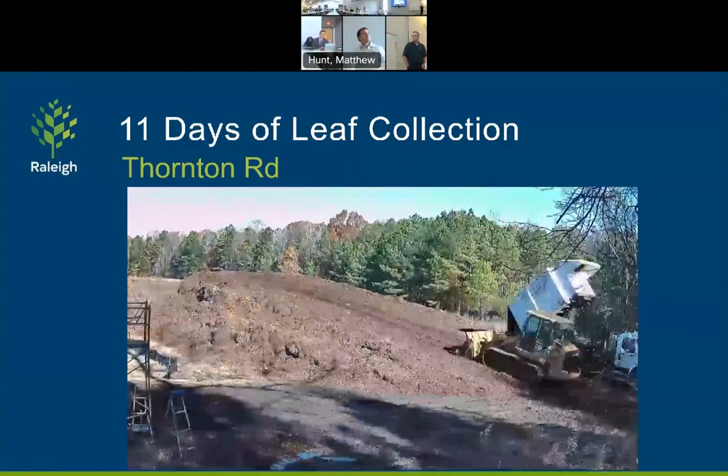And here's a video of a leaf pile. Took 11 days to make this leaf pile, and it has 304 loads of leaves dumped in it. That was in 2 zones, the northeast side of Raleigh. So this is one of 6 sites. One of like 6 of these, right? Sites, yes, ma'am. And then we'll haul, these are temporary dump sites, and we'll haul them to, right now, Walls Recycling, and have to pay to dump them there.

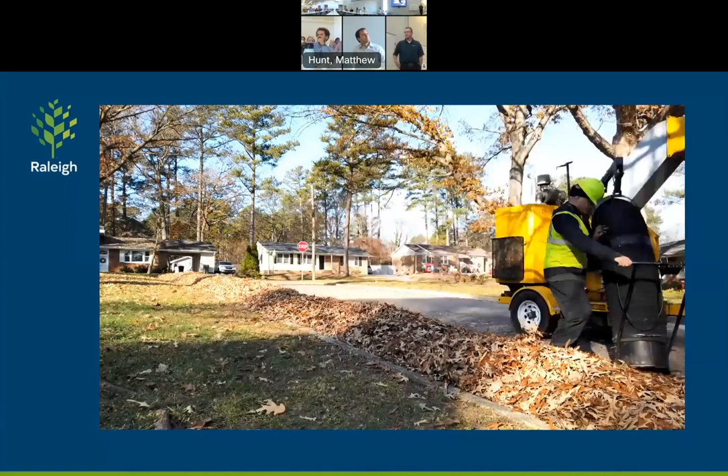And they can take pictures if something is obstructing the pile, like a car, sticks in the leaves or whatever. So when people call and say, hey, you didn't pick my leaves up, we can go back and say, there was a car parked in there at this time, this day.

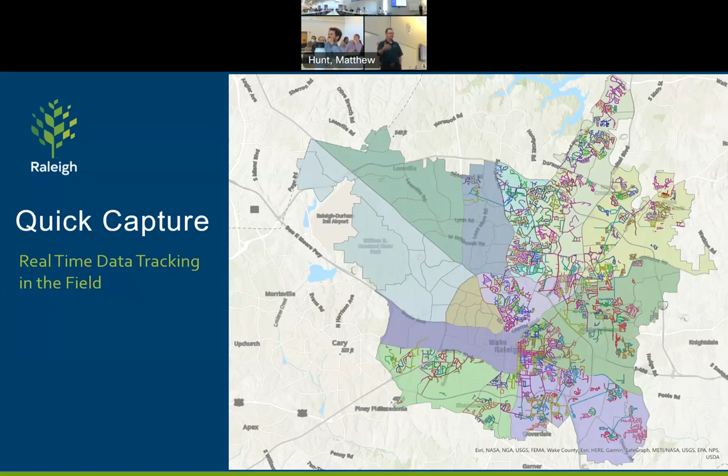Year to date to yesterday's numbers, last year at this time, we'd been in 10 zones, picked up 1,651 loads at about 30,000 cubic yards. This year, we're on schedule. All the leaves fell early this year. We've only been in 7 zones, picked up 1,455 loads at 30,000 cubic yards. So we're about at the same cubic yards and loads, been in less zones.

Any questions? Yes, sir. I have questions. I'm intrigued. How many zones total in the city? 12. 12, okay. We broke the zones up into different maps. We have 4 field supervisors with 5 trucks apiece, and they put them in the zone, in the map. The least amount is 8 maps in a zone. The most is 14 to go through one zone. And there's 12 different zones.

So after you drop these in these 6 temporary sites, how long does this program run? From November 1st to? So we started November the 14th this year, and we start about the same time every year, runs to about the end of March. I know last year we started hauling off from these temporary dump sites during leaf season. So when we were done with picking up leaves, the temporary sites were moved.

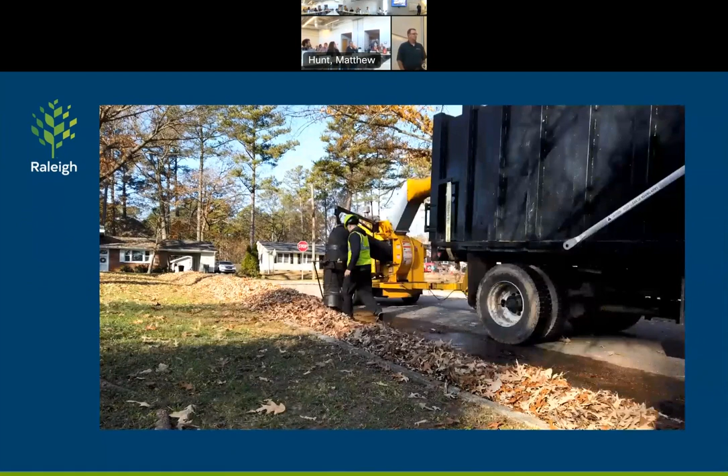A good example is the street cleanup where they have the vacuum thing that goes around, obviously a very manual process with a lot of staff involved. How often do you see, from a stormwater perspective, it being on the property side versus the street side? If it's blocking the way during these large storms, are there notifications that go out about how to properly do that, or what kind of communication?

Yes, ma'am, there is. We put out literature through Rob Murray, through Stormwater, through mailing and all of that. It says put it behind the curb, not in the street, but we do not have anybody that enforces not putting them in the street. So we tell everybody not to. If we see somebody doing it, we'll try to explain, but nobody wants to leave it on the grass. And it's in the street everywhere.

Some people do, but that's like a tip to citizens. I'm thinking about neighbors who have help with their yards and hire that. Is that notification going out to lawn service providers as well? Yes, ma'am. It does go out to them, and if we see it, we do not collect it, because we're not supposed to collect landscapers' stuff. If we see it in progress, we don't collect it. We let them know that they're getting paid to haul it off.

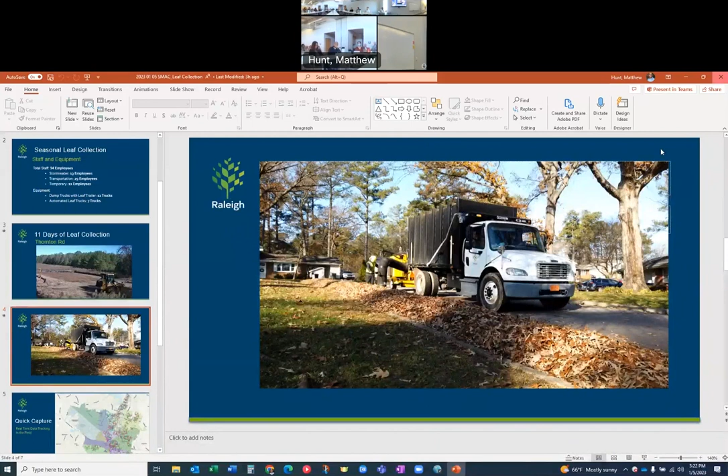And I guess one other just quick update, we've been giving periodic updates on our equity program and plan implementation. We do have the consultant on board, have a kickoff meeting next week for our operational equity scope of work, and we'll continue to give you updates on that. And then I would anticipate a future presentation back to the commission once we get into that project far enough that we'll be able to show some progress and some ideas.

Just a quick reminder, a few of the items they're looking at: they're going to help us look at how we do our prioritization ranking for our capital improvements projects, implementation of the equity framework that was developed for the watershed studies. We saw some presentations on the community outreach engagement. We're continuing to work on that, and we'll get input from the consultant on how we can improve that program, as well as other internal operational issues, personnel issues and hiring and so forth. So we'll keep giving you updates on that.

And then lastly, no notices prior to construction to announce at this time. Thank you for that. Appreciate it. Stephen, I believe you're going to talk to us about Raleigh Rainwater Rewards Project. Quarterly update.

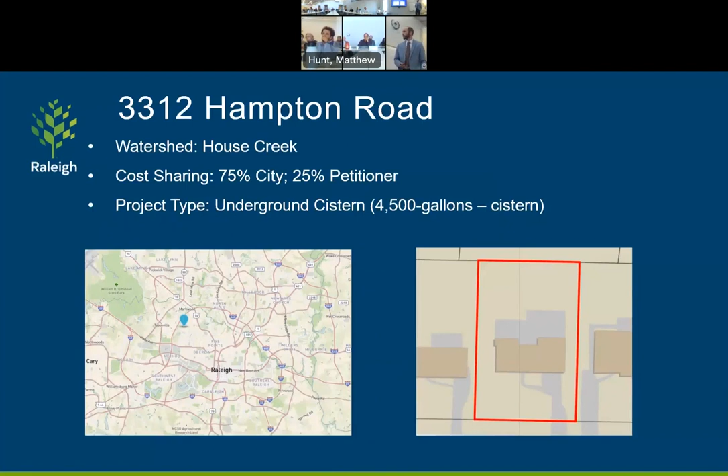First one is at 3312 Hampton Road. This is in House Creek in the 75% zone, and it is a series of 3 cisterns, a total of 4,500 gallons. This is a new build construction, so as you can see, it's still being designed. The cisterns are located in the back of the property, and you're going to have rooftop and patio draining to a series of 3 inline cisterns.

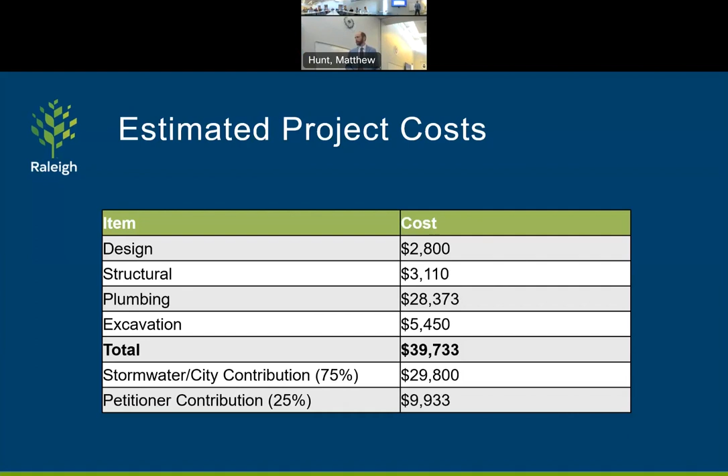Here's the breakdown for the costs. As you can see, the total is roughly around $40,000. And the city contribution is around $30,000. The numbers work out pretty nice.

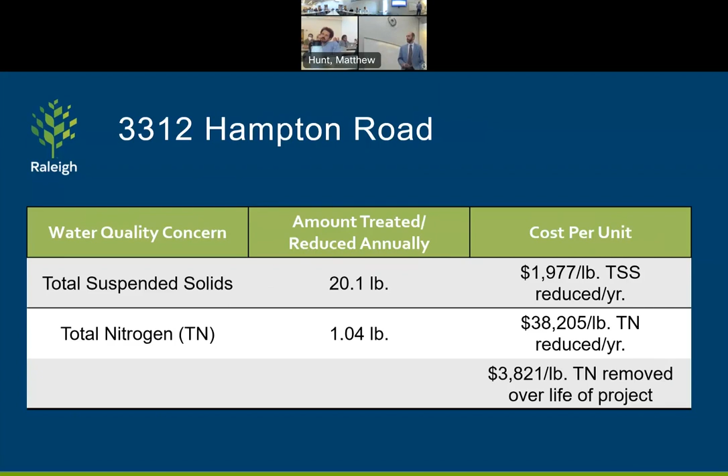This is the pollutant reduction calculations that we performed. So as you can see, total nitrogen is roughly 1.04 pounds. Total suspended solids is 20.1 pounds. And the costs relative to the total acceptable costs of this program are indicated on the right here. And I'll have your comparison next slide so you can see it compared to other projects.

Here's your typical slide, as you've seen before in the past: the maintenance requirements that we give out for that 10-year maintenance period. And Graham, I know this is common, if you'd like me to have approval for all 4 at the end, let me know, or we can approve them individually. Reverend Taylor likes to combine them together, but since we have some individuals here with separate projects, I'd say let's just vote or deny each individual project.

Well, are there any questions first before you decide to vote for Hampton Road? What's the life of the project you're estimating? So, we calculated based off a 10-year maintenance period. After that, it depends on what the homeowner would like to do, if they maintain it or they destroy it. I highly doubt that they would destroy their cisterns, but we don't calculate that pollutant removal after that period because that legal agreement that we ensure expires. But during that 10-year, we will check in.

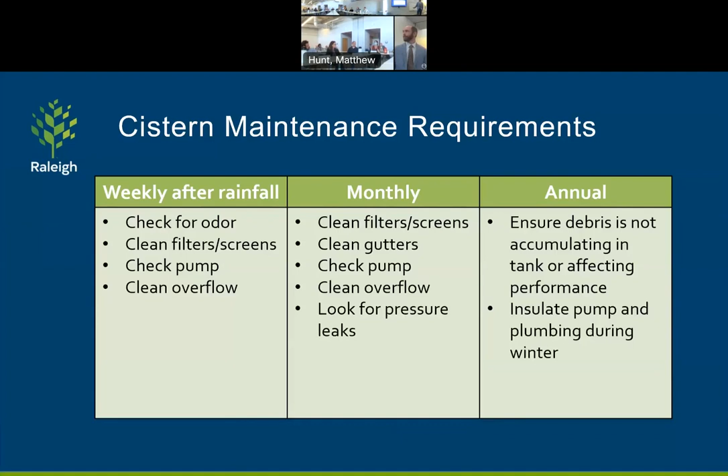I am just missing this. So typically when we're looking at some of these, this one, the water is draining from the roof, so that's kind of a patio area. It seems to be not used, or partially used, just storage. The rest will just go straight later on or be stored there temporarily, so slowing down the flow pretty much is the main benefit.

Well, yeah, and it's also treatment based off the passive drawdown. That first 1 inch is all tied into the pollutant removal calculation that we have. So that first 1 inch is sized accordingly, and that tank needs to be a minimum of that size of 1 inch, calculating that impervious drainage. And then that first 1 inch will passively draw down within 72 hours in a vegetated zone, slow drawing. And that's the treatment, the pollutant removal process. Understood. And then it is sized additionally past that for whatever beneficial use they'd like.

I mean, I think it meets the criteria. It was interesting in some of what we're hearing, but at least it's in the mid sweet spot of what your criteria are. Absolutely. I can support it. Motion to approve or deny. Motion to approve. Motion to approve, with second. And for David, okay, all in favor? Okay, all right, opposition. Thank you. Thank you.

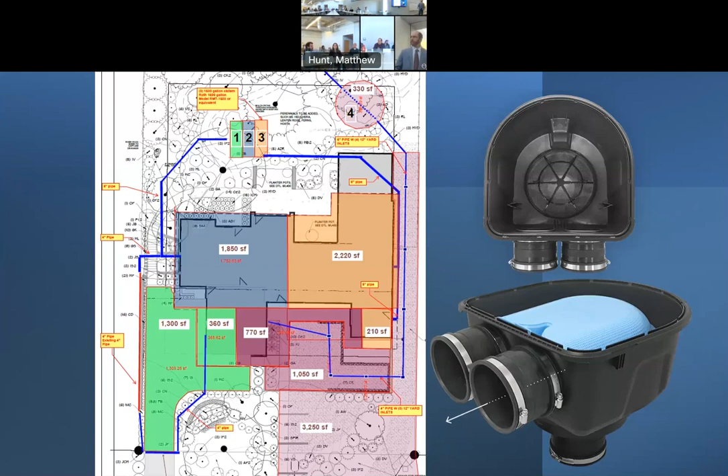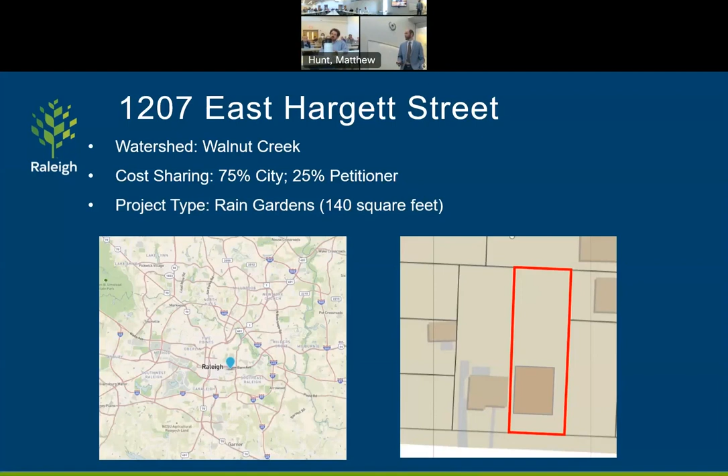Our second is located at 1207 East Hargett Street. It's located in Walnut Creek, right on the edge of Pigeon House Branch, so it's in the 75% zone. This is actually a series of 2 rain gardens, one in the back and one in the front, for 140 square feet total. He's got a small shed in the back, which will drain to one small rain garden, and then part of his house will drain to the front. It's located on the flat area of the hillside.

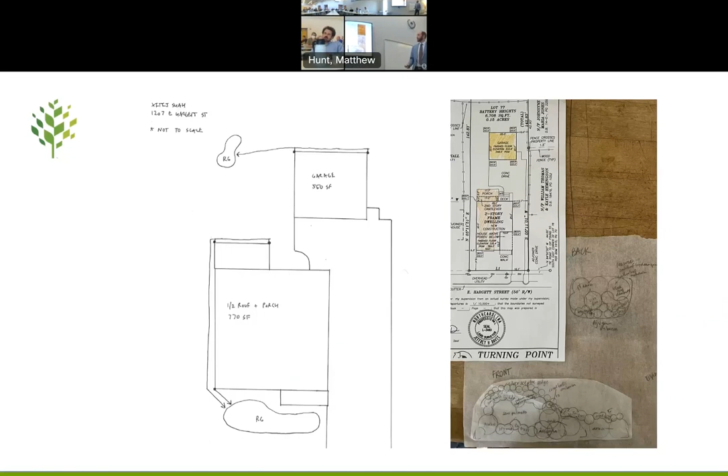These drawings are not quite as nice as the other, but they're trying to relay the site plan for you. You have the garage over here that will drain to a small rain garden, and the rooftop will drain to this rain garden in the front. These are his handwritten drawings with the plat map and his calculations, so we can verify. Here's the cost breakdown according to the landscaper.

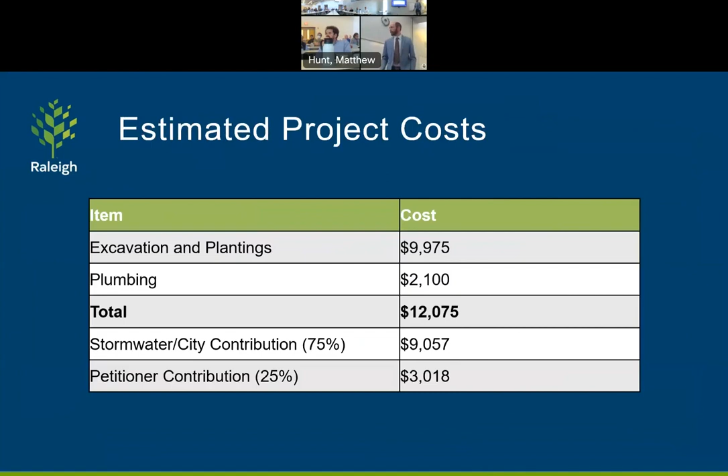Yeah, so that was an issue that I brought up right away. Otherwise it's not going to actually do a whole lot. So I asked him to be at least 10 feet away from the footing of his house. And we discussed it too, because that slope and the natural pathway of drainage is going to pool inside that rain garden, but it's going to naturally flow away from the house.

So everything is grading down, there's no addition. I mean, he's done all the tests on the property. Yeah, he's done percolation tests, and it looks good on both the rain gardens in the back and the front. And I think a lot of that is because the house is sitting on quite a bit of fill. But yeah, it will percolate inside the rain garden footprint itself. And there is an overflow device past that 1-inch rain.

And it seems like one of those that a couple of years ago was under the $5,000 threshold. Yeah, and last time when I was here, we dealt with this too. This particular contractor, when we asked the same questions, his response was that the costs are increasing for not only materials, but labor as well.

And also it is relative. I do find, at least recently in my experience, sometimes with smaller rain gardens, you get that lower removal rate, and yet the cost to mobilize and to bring that equipment in is high. So sometimes I tend to find them a little higher in that comparison versus the flume removal. But it is underneath our cap. I believe the number is 5,500 roughly, with the cap of 7,000.

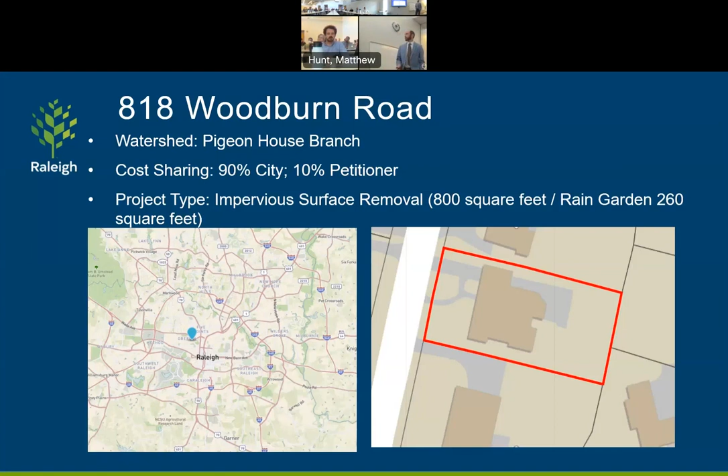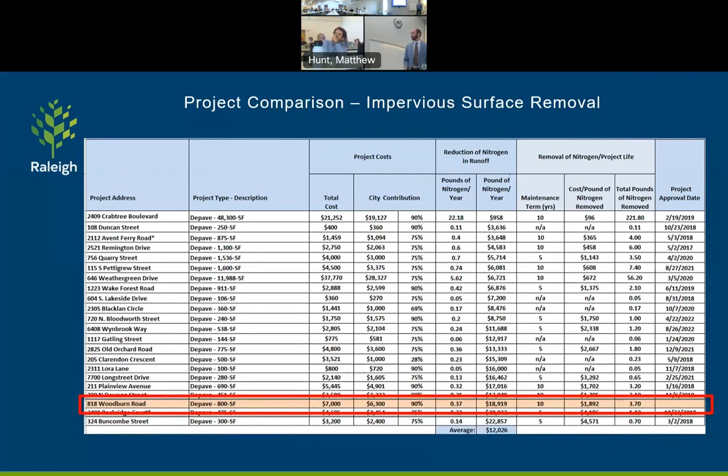You better go back to the total cost then. That's, this, have this landscaper pricey last job. This guy seems to be a lot more important. The guy on the last job. Well, on that segue, I'd be happy to actually bring him up since he's... I'm just saying, need three numbers. Nah, yeah, no questions, but yeah, you guys would like. Yeah, I'll let him present and then I'll open for any more questions.

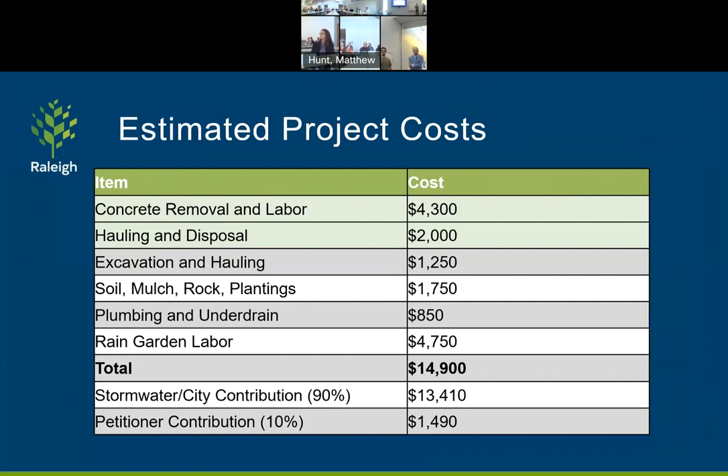Okay. I don't know too much, just thanks for hearing us out on the project. We're pretty excited. We've done, I think, one or two projects with Rainwater Rewards before, but this is the biggest one we've done and pretty exciting from a removal concrete standpoint. Impact to the Pigeon House watershed, particularly high up in the watershed. So, yeah, happy to answer any questions and thanks for your time.

Are there any questions? See anything? And appreciate you being here. Thank you for your time and your interest. Anybody have any questions or a motion? Vote to approve. Second. Call them. All in favor? All opposition? Thank you. Thank you, guys.

I'm gonna say thank you. Figured you might. Thank you for being here. Sometimes we have a swimming pool in the backyard, you know, about the concrete stuff. Not what we put in. Yeah. Thank you very much. Looks like you're gonna have a great deal. Yeah, it's nice to put a face to the name too.

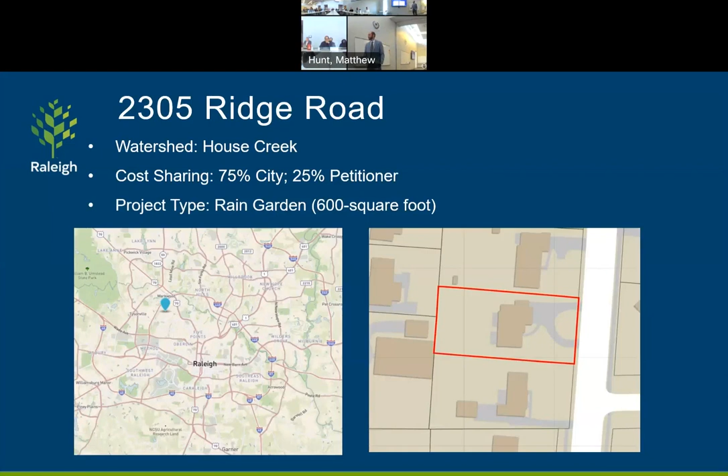All right, the last one is 2305 Ridge Road. It's actually just right up the street from the first presentation that I did. It's located in House Creek. This is in, once again, the 75% zone. And this is a large 600 square foot rain garden located in the back of the house. This is roughly the location of the rain garden. This is actually looking off their deck.

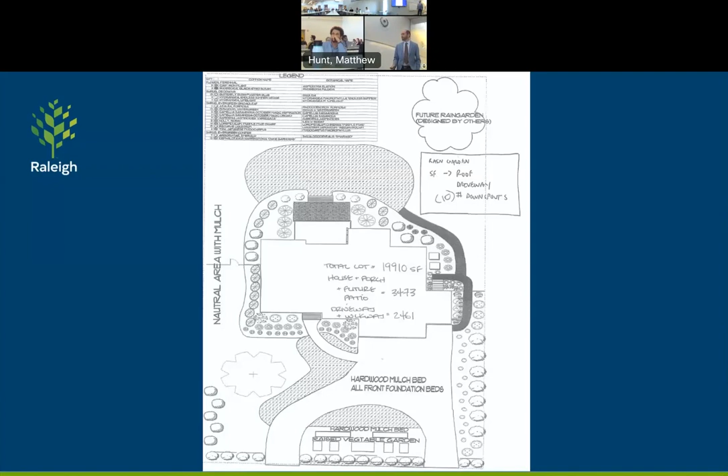Here's a site plan look. So they're going to be diverting their rooftop to the back. You can kind of see in the top right is the rough location of that future rain garden, if approved. Because of the size, this has a fairly large pollutant removal rate. As you can see, it's about 1 pound and 10 pounds, so very similar to the first one too. And here's a comparison chart.

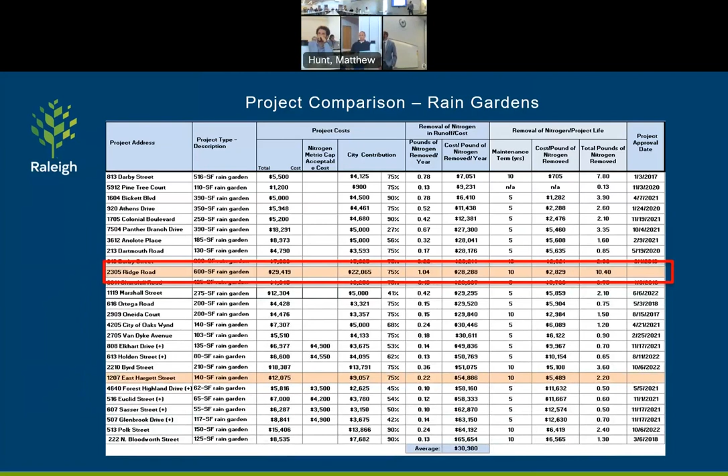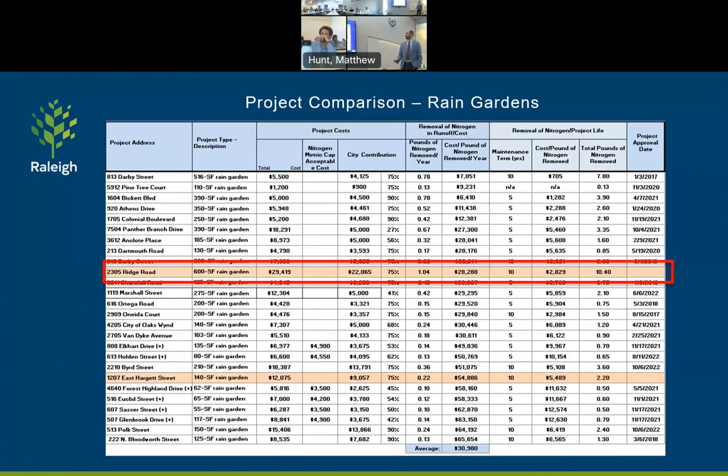The quarterly report in the stack, agenda backup items, you'll see a summary of projects approved and projects reimbursed since the last time we presented. You'll also see our rapidly growing list of projects in table form, sorted by our nitrogen metric, separated by project type. So happy to answer any questions either now or after the meeting, or via email.

Anybody have any questions? Anybody dive into the details there? Again, I'm sorry, I didn't. Appreciate the information. All right, thank you. Thank you all. Yeah, thank you. All right, next item, USGS role in urban hydrology and data science. Charlie Stillwell, PhD, speak to us.

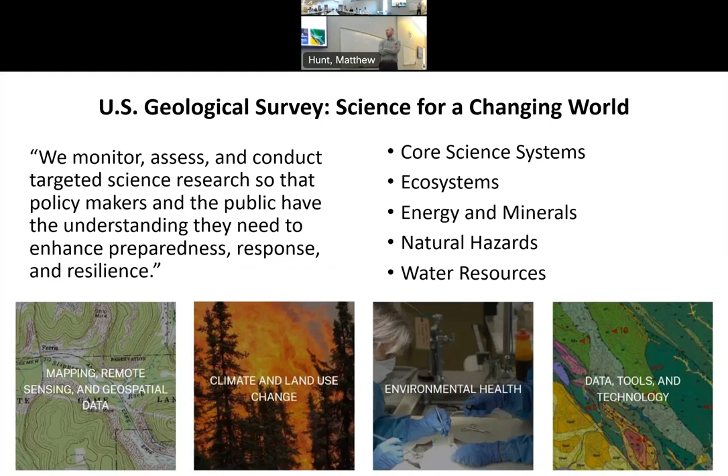It's very buzzword laden, but essentially we do earth science. NASA's looking up into outer space; USGS, Geological Survey, we're doing earth sciences. EPA is doing regulations. So we're broken into these 5 units. I'm in this last one, the Water Resources Group. And in all of those different units, we have these cross-cutting themes that you can see some examples of across the bottom. So, we're always thinking about climate and land use change. We're thinking about environmental health and all these sorts of different things you might know from all of our maps and that sort of stuff.

Zooming in a bit more to our center, it's the South Atlantic Water Science Center. All these units are broken down into kind of regional areas, and we are in the South Atlantic region. The reason this is done is because some of the units of the government have kind of top-down policies: here's what our Congress wants us to work on. But our mission is more locally focused. We partner with local and regional stakeholders and partners and work on projects that are relevant to folks in the states of North Carolina, South Carolina, and Georgia.

The bluish, darker dots are like the headquarters offices in each state. We also have field offices because we collect data anywhere in the footprint of the state. So even if someone all the way in the most southwest corner of Georgia wants a stream gauge there, then we are required to collect it. So that's why we have to have these field stations all scattered throughout the area, because that's all of our purview, and we've got to be able to monitor and keep those sites online as quickly as possible.

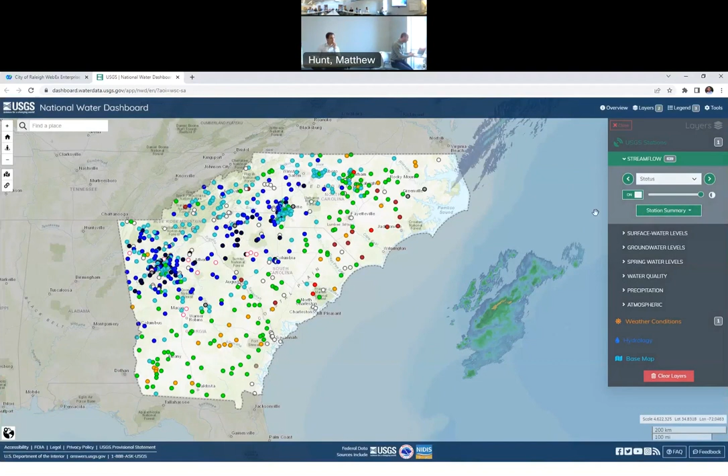And I was hoping to show you some of the data we collect. Our first and foremost role is to collect foundational data. And it looks like this will work. That's great. So this is just what we call our National Water Dashboard, and this is a map. Hopefully you all can see it. It basically just shows all of the places that we collect data in our region. So the default that shows up is stream flow. So these are all the streams that we have gauges on where we're measuring discharge amounts in real time, recorded in 15-minute increments, available online. So that's very cool. I'm going to turn that one off and turn on surface water.

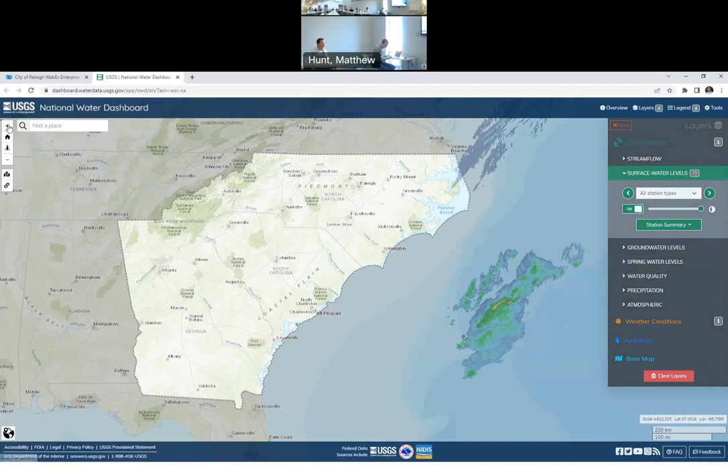So that's station types. And I'm going to zoom in to Raleigh. Show you what we got going on here. See, as we get a little closer, there's a number of different dots in our Raleigh area. You can kind of follow Crabtree Creek, starting at Umstead Park, moving downstream. This is all on Crabtree Creek. We have one on the trib here. This is called Marsh Creek. And you can see a similar pattern starting towards the top of Walnut Creek and moving downstream. We actually have a lake station in Lake Johnson that reports surface level elevations there, and you keep going downstream. So these are all the places where we're reporting real-time or near real-time water data that then the city uses.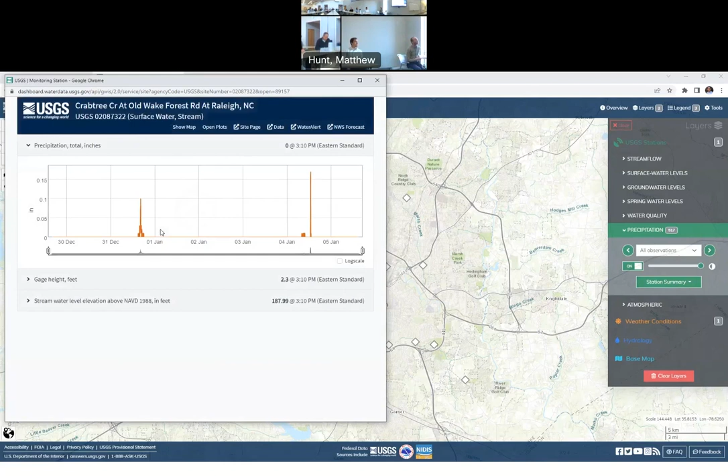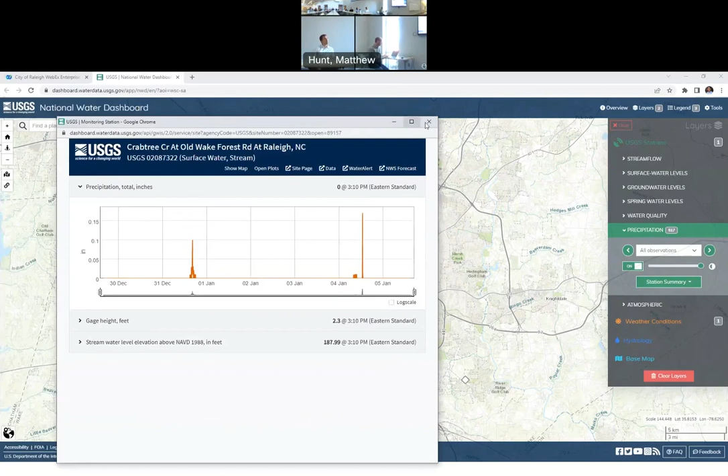Let's see, I'm going to show another one real quick. For precipitation, this is another type of data we collect and report in near real time. Here's the network of precipitation gauges that are across the city of Raleigh's area. The city of Raleigh uses this data a lot, but really this is all available to the public. This is not an internal website, so anyone can click on any page. You can see the data is slow to load, apparently, but there's the precipitation data from the last 7 days at this specific site. You can download it and learn more about it, all sorts of stuff for the public. All right, anyways, let's go back to my slide here.

So all of that data is collected by hydrologic technicians. This is someone collecting a discharge measurement. Depending on what your degree was, you might remember learning a little bit about discharge measurements, where someone's standing on one edge of the stream, measuring how fast the water's going, step to the side, measure how fast it's going here. Combining all the velocity of water and the depth of water tells you how much water is flowing across the entire channel in that moment. So we collect a lot of readings like this, and then we can translate that data into real time because we can measure the depth of water, and that's just reported. It shoots into a satellite or something and goes into a database. I don't know how any of that works, but that's how we collect our data.

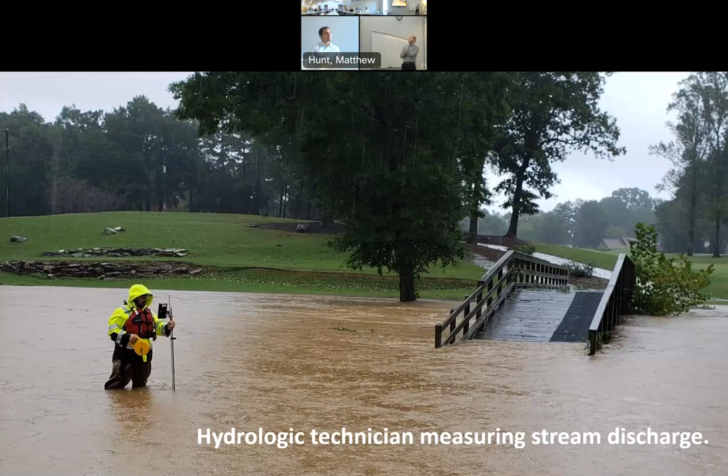Here's another example of our hydrologic technicians. Here they're collecting water quality information. So they're collecting samples, again, weighted. You go across the stream, collect a little bit on the left, a little bit on the right, a little bit in the middle, see how that changes across the channel. And that helps us understand our baseline water quality conditions.

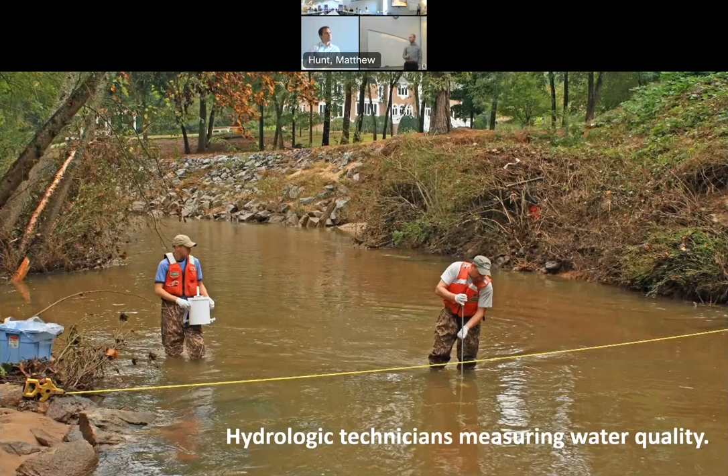So it all kind of comes down to this foundational data. All of this data is the foundation for something greater. All the hydrologic technicians are installing, operating, and maintaining all of these stations. They require a lot of attention to make sure our data is high quality.

They also inspect, review, and process all the data. Basically, every morning, their first task is to go online and make sure their data looks like they're expecting it to look like. If a sensor goes down, they know it that morning and then go out and correct that information, go out in the field and fix the equipment or whatever they need to do.

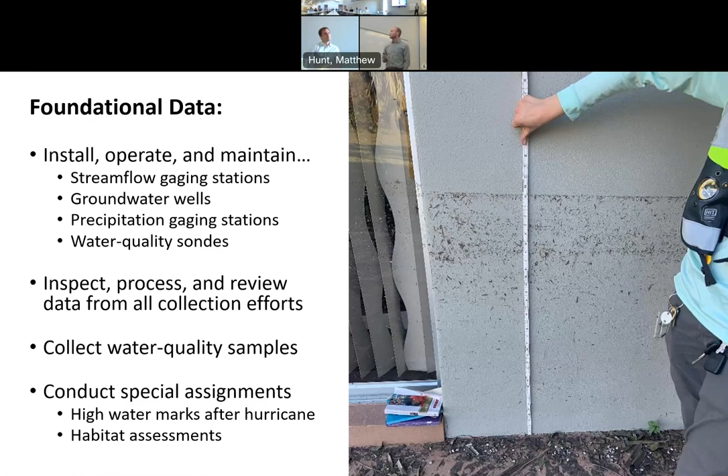And I keep mentioning that foundational data as a segue into a big project that the city is doing right now that uses that foundational data, which is the flood early warning system. So these dots, the yellow dots, are where the flood early warning, I guess that's where the signs are located, or maybe that's actually where the gauges are, but you can see how similar this was when I was pointing out the stations following along Walnut Creek in the south and Crabtree Creek in the north.

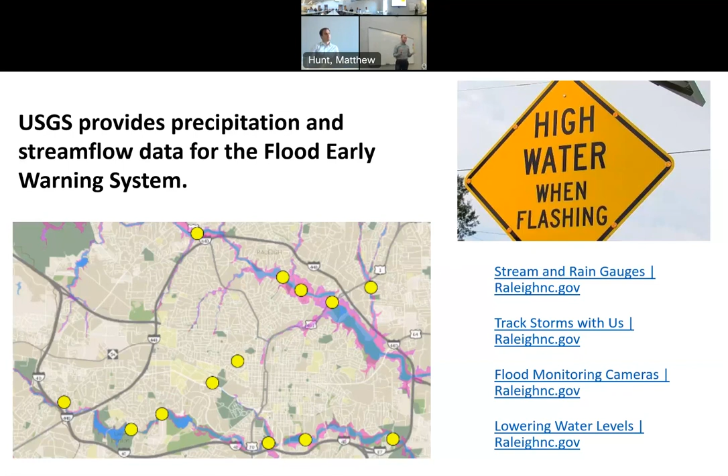So the USGS data is put into this flood early warning system. I think it's Feats and Associates or something. They then process the data to provide these real-time flood alerts, and that's what activates the signs and all that sort of stuff. So that's really cool. We do our part to make that possible and then make that data available to all sorts of others who want to use that data, which we find very exciting.

Another use of our foundational data is for a project called the Triangle Area Water Supply Monitoring Project. This is relevant to us who live in Raleigh, but there's a lot of partners on this, including Town of Cary, City of Durham, all sorts of counties that all use basically the water from Falls Lake and Jordan Lake. This project has been going on for probably about 30 years now.

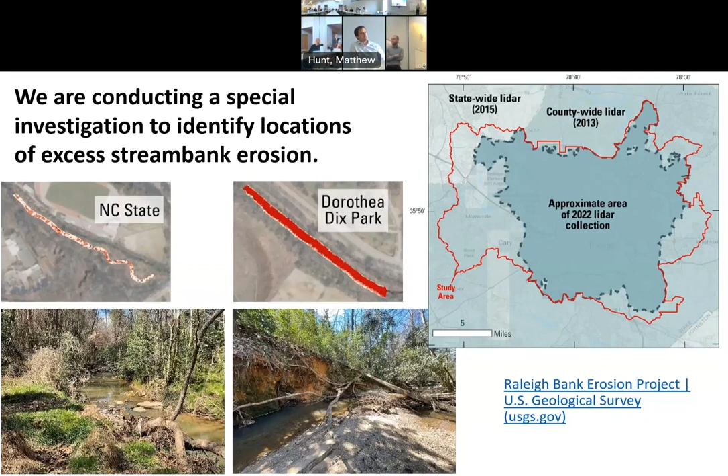A lot of folks outside the city limits use private wells for their water supply. So understanding how, if we plug in what we think rainfall patterns might be 50 years from now, is the groundwater going to respond as it is now, or is it going to be changing in the future? So that's another cool project. I'm not a groundwater hydrologist, so don't ask me any questions on that one, please.

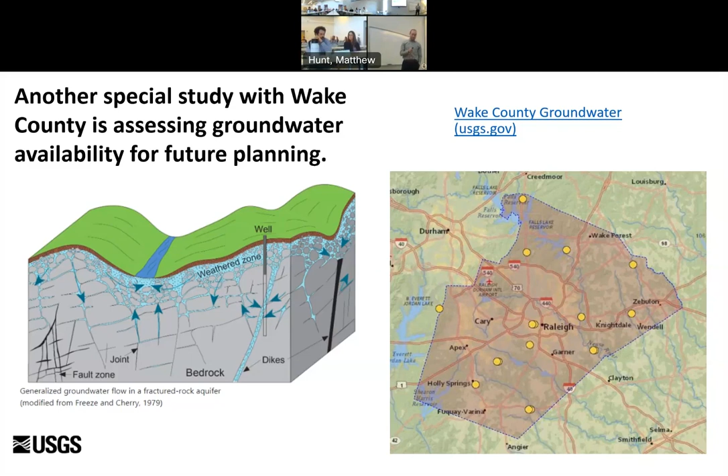And then lastly is a really cool project that I'm excited to be starting up in a few months here, hopefully, specifically in the Walnut Creek watershed.

So that starts in Cary, but covers all of South Raleigh. And I've petitioned for Walnut Creek to join the Urban Waters Federal Partnership, which is a kind of consortium of these 15 different federal agencies. USGS is below DOI, which is the buffalo there. But USDA, the Forest Service is there, Army Corps of Engineers, NOAA, FEMA, all sorts of these federal agencies basically pool resources and expertise in an effort to identify neighborhoods that are underserved and support them with our hydrologic information, but also some funding sources.

And the Walnut Creek area, especially in southeast Raleigh, is prone to flooding a lot of the time. I think probably the folks in this room are familiar with the Rose Lane drainage study. That's one of the neighborhoods in particular that we've had some interactions with and are trying to think of ways to support this group. So as a part of that, we are going to be joining this Urban Waters Federal Partnership. I'll be the main federal representative for the watershed, but really it's a community-led effort.

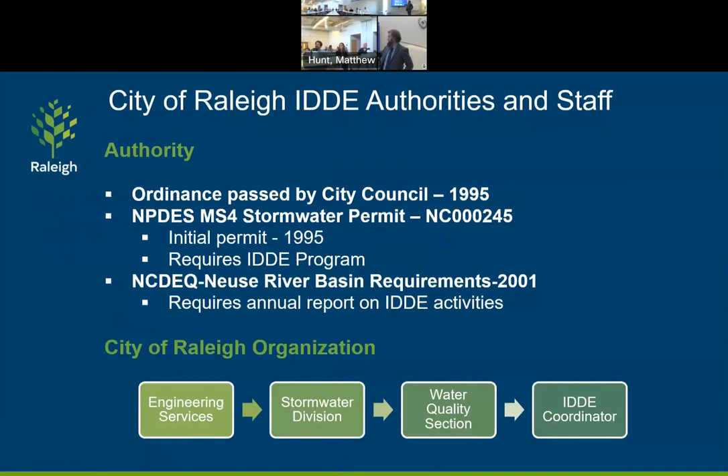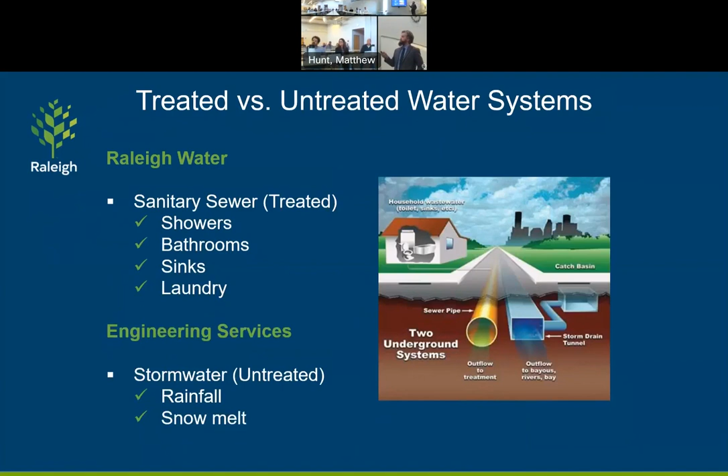Here you can see I'm the IDDE coordinator. I'm under engineering services, stormwater, and a part of the water quality section group. As you may or may not be aware, Raleigh has 2 separate systems. They have a sewer system and then also a storm sewer system. And the storm system is part of the MS4, municipal separate storm sewer system. And that allows us to discharge to creeks, natural water courses, etc.

What exactly is an illicit discharge? Illicit discharge is any disposal, dumping, spill, or leak or otherwise discharge other than stormwater that goes into a stormwater drain, a drainage system, or natural water courses such as lakes or streams. This also includes land near a storm drain or a lake/stream where a substance may enter the stormwater system. So as you see here, we do have a program where volunteers can mark storm drains as well, if they're not marked. That's a good program that Joyce runs, if you need any contact with her.

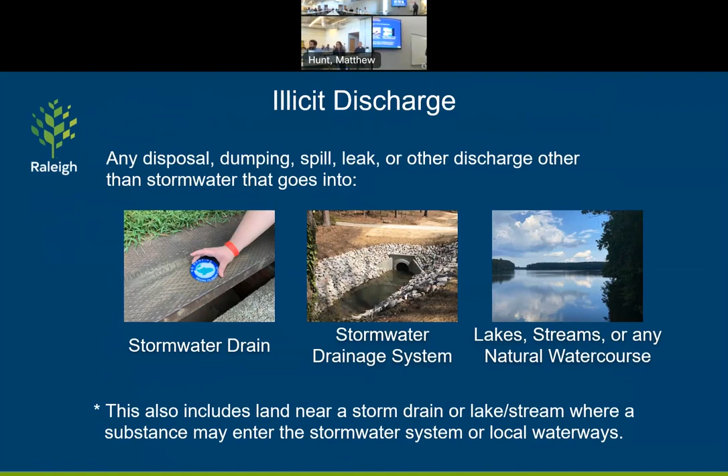Illicit connections. We don't see these often. I think there might be one over the past decade or so that I've come across, but basically it's a pipe directly tied into our stormwater system. Usually PVC pipe draining from a washing machine, or in the case that we had was a pool discharged straight into the storm system.

There are some discharge exemptions that we do allow. There's a long list of these. I'll just kind of leave these up here, but these discharges are allowable as long as they do not decrease water quality significantly. So a lot of times it's just mostly potable water, dechlorinated swimming pools, condensate from air conditioning, residential or non-profit car washing is allowable discharge.

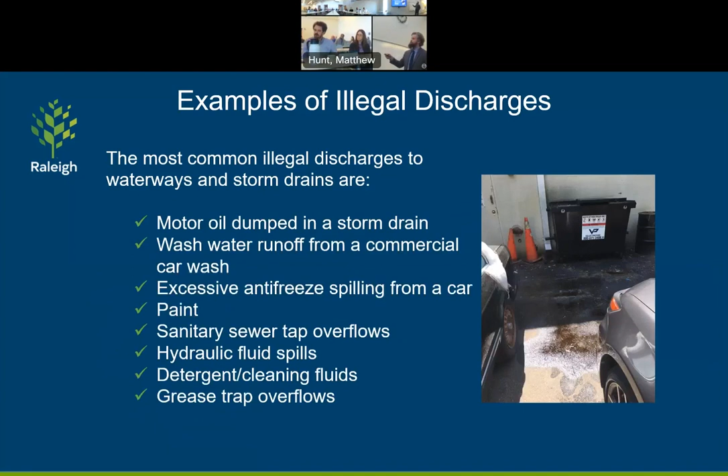These responsible parties then have 10 days after being notified to stop the spill and complete remediation. Once staff is made aware of remediation, we'll conduct a final site assessment and issue a notice of compliance.

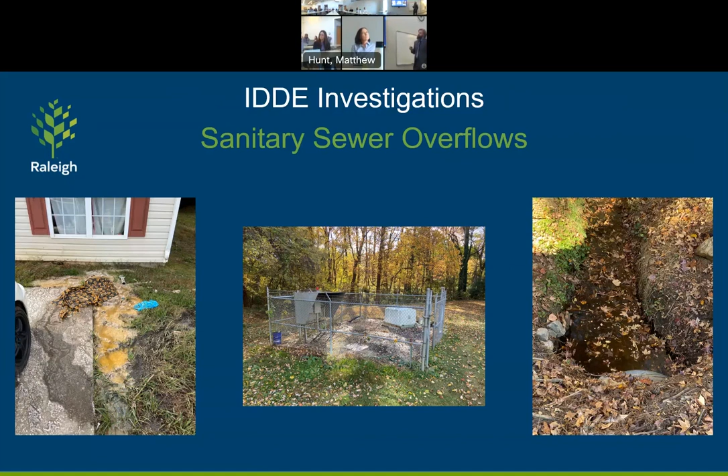Here we're looking at sanitary sewer overflows. Like I said, if the City of Raleigh owns the sewer, they'll do repairs, remediation, and any reporting requirements to NCDEQ. Water quality staff get provided summary events of these monthly, and we record these in our CityWorks application for tracking and end of year annual reporting.

Private sanitary sewer overflows are the responsibility of the property owner. We routinely coordinate with Raleigh Water Code Enforcement for further enforcement. As you know, if the sanitary sewer does not discharge off property but is contained on property, we don't get involved unless it does enter into our storm system or into a natural water course. Raleigh Water does have the capability of shutting water off after 48-hour notice. So typically they're involved most of the time.

And then a lot of times if it does reach our storm system or a natural water course, that's when illicit discharge gets involved as well. Same as before, property owners have 10 days to make repairs and remediate. And also they have separate requirements with DEQ if they need to report or anything like that. Usually you'll need to report if you have 1,000 gallons spilled or any amount of sewage reaches a natural water course. And usually for those 1,000 gallons, you'll need to issue a public statement explaining the discharge.

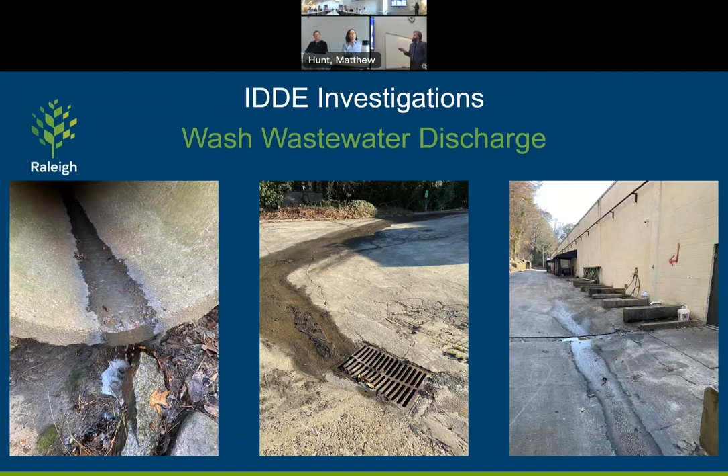These are typically found while staff are conducting dry weather flow inspections. And I can get to that a little bit later in another slide, but at the outfall, you will see some of this milky white material or sudsy material, et cetera. And it can sometimes be hard to trace back up; it depends on how big the watershed is and how many places it could flow from.

Here's another area. You had a restaurant taking their mop water, et cetera, and just dumping it out the back of the restaurant and entering into a storm drain, which then ended up at the outfall as well. And here's right behind the restaurant.

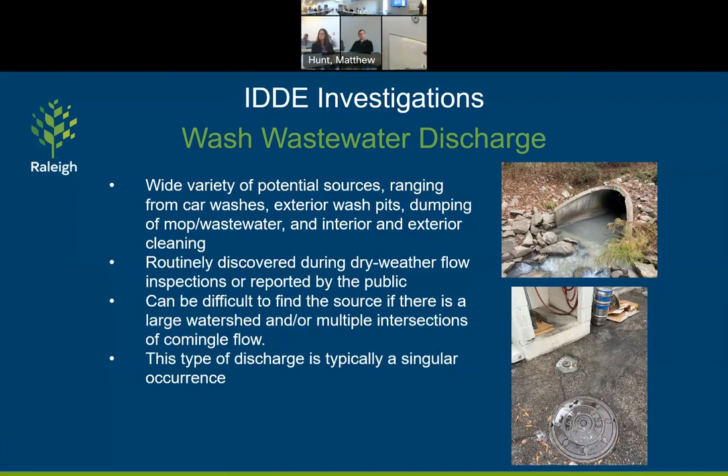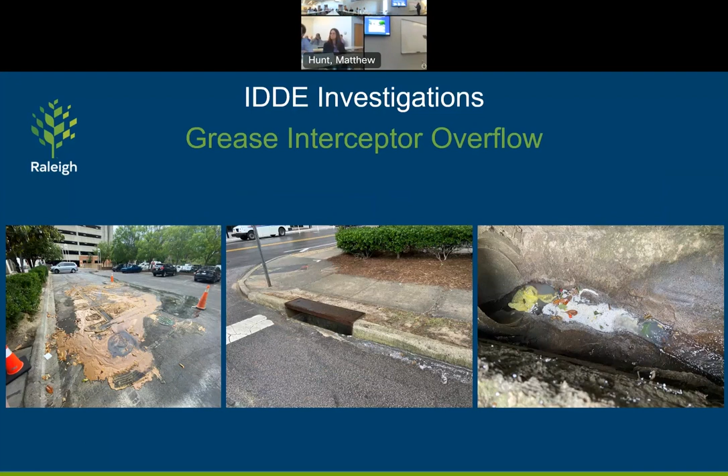Fuel and oil spills: largely these are found while conducting dry weather flows again, or a citizen happens to see some type of fuel spill or someone dumping it into a drain, and they'll hopefully notify us quick enough so we can complete our investigation. Here you'll see some dry oil absorbent that was placed.

City of Raleigh does have its spills as well, usually from hydraulic lines on the sanitary waste trucks driving around. They do have contracts in place for remediation and cleanup, which usually happens within the first hour or so of the fuel or the spill being noticed. So we're pretty responsive in that regard.

Staff also have cleanup training as well, and they usually carry some type of absorbent in their vehicles as well to help mitigate any kind of downstream impacts.

Yard waste: transportation and field services will handle any kind of cleaning. So if you see a storm drain getting clogged, such as this picture indicates, then we will need to contact transportation. If you do happen to catch individual citizens intentionally dumping their leaves into the storm drain, feel free to reach out to us. We'll make a field visit and speak with the homeowner to try to correct that action, possibly issue a notice of violation.

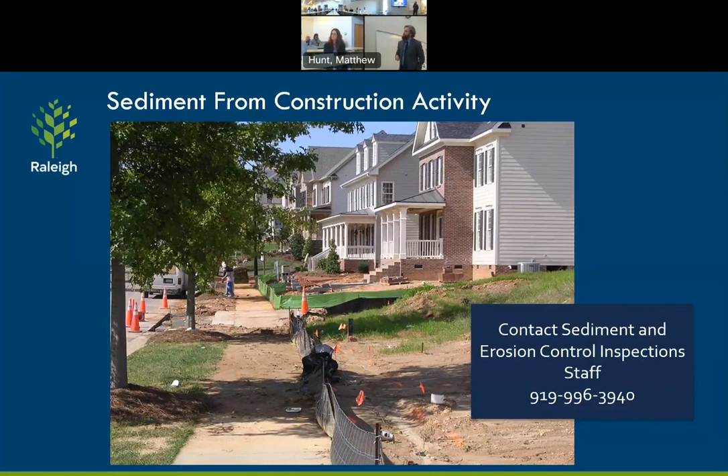For sediment and erosion, we'll reach out to the active construction group, which does inspections for all these family homes or large plots. Some other IDDE program requirements, as mentioned, dry weather flow inspections. Recently, we've updated this to have over 1,000 prioritized outfalls that will need to be inspected per permit cycle. The goal is to complete roughly 20% of these every permit year.

We also do quarterly outreach mailings and efforts, targeted mailings that are specific to certain pollutants that we have for each quarter. Landscape companies, food trucks, restaurants, anything from nitrogen spray to fertilizer spraying, et cetera. And then we also do IDDE training for new employees, and that occurs every 3 years as well.

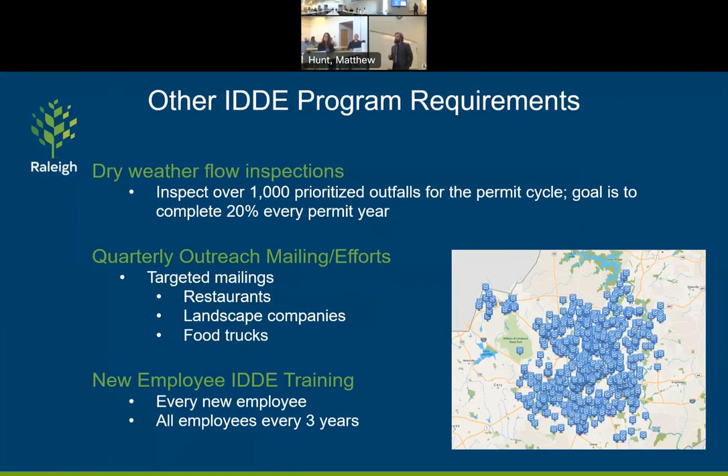And then staff involved directly with the IDDE program will do a HAZWOPER training. We'll do an 8-hour refresher, and then staff are looking at more involved training as well.

Some program updates that we've completed over the last 18 months. We developed a program plan that helps set roles, schedules, and program expectations and references, or SOPs. This helps to lead the program for the foreseeable future. It's a good guideline to just keep the program moving along. In August, the program was put under an NCDEQ compliance audit.

For a whole day or so, the program went through all of our SOPs, plans, procedures and stuff. No deficiencies were noted. There were a couple recommendations for further improvement. Staff have already implemented these recommendations in each of our plans.

Part of the audit was updating our major outfall inventory. Originally, we had designated about 300 or so outfalls, and then per DEQ's guidance, we changed the definitions of those outfalls, and now we have over 1,000 priority outfalls. We plan to inspect about 20% of those every year.

And then one huge help, kind of citywide, was to streamline interactions with the public, our communications, and tracking interdepartmentally, as a lot of our reporting now is through CityWorks. That's a good way we can keep track. We can see who took the call, who answered it, who investigated. The inspection reports are tagged to these service requests.

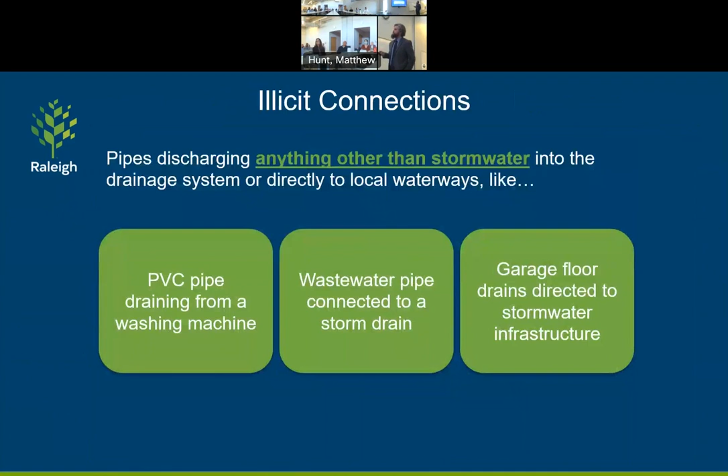The website is kind of in limbo with some staff departure recently. So we've been trying to work with other staff to help keep it running. So I do apologize. I'm just hoping with all the education, all the efforts you guys are putting into it, things are improving, but maybe they're getting better at finding stuff, and so you really can't see that trend.

That is one case, and we lean heavily on the public as well for notifying us of any possible illicit discharges. And it could just be that the public is becoming more aware of the program, and they're just reporting more instances that just weren't reported before. But a lot of times when we issue notices of violation, 95% of the time they're resolved within that 10-day period. So we work closely with those individuals to make sure the follow-up is clear.

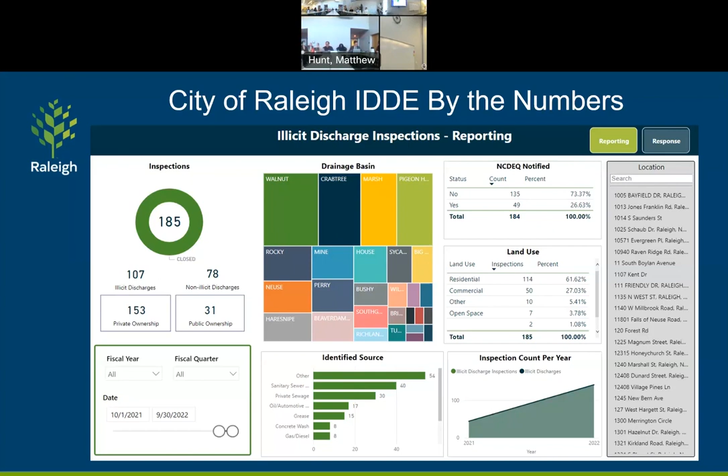I believe that may get us close to the end of the meeting. I just would close by saying if there are topics for the year that fit within our work plan and are of interest, or things we would like to learn more about, just shoot an email to me and Jamond, and then we can take it to Wayne as we're crafting agendas for the year. There's a Google Drive that Wayne shares with Jamond and I, and it's a couple months deep, so we kind of worked out a few things.

But if there are things you're thinking of or you see around the city, then definitely don't be afraid to ask. See if we can dial up a presentation or a conversation about it. So I think that's it, unless anybody has a question on the topic or anything interesting they've seen. Holidays. Stormwater.